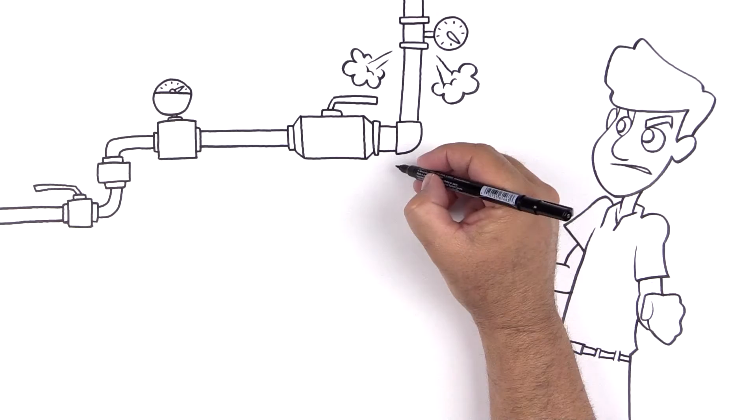Heaters are meant to provide reliable temperature control and stable water heating, yet you spend a lot of time and money to achieve this goal.

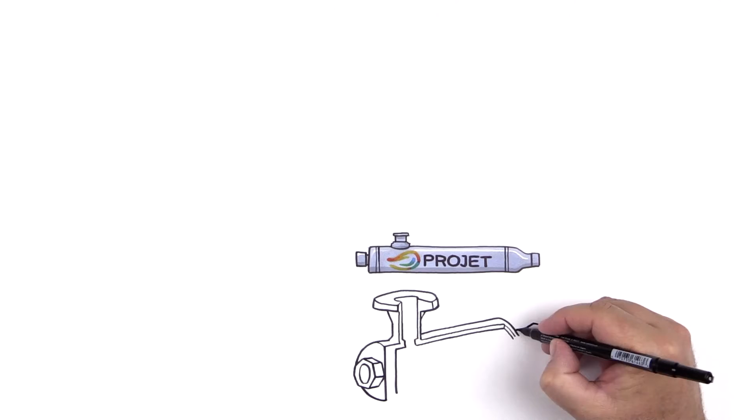ProSonix can help. The Projet Heater is an energy transfer device designed to heat water. With a self-modulating two-stage heating design, the Projet Heater provides stable heating performance and is easily maintained.

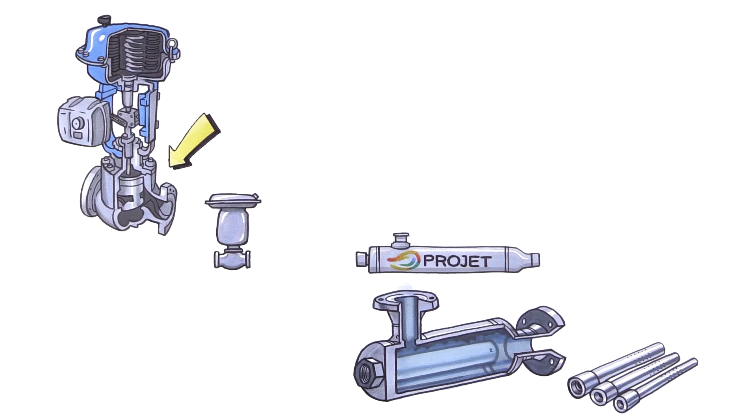The steam control valve regulates steam pressure into the heater. Typically, this valve is a globe valve or a V-notch ball valve. There are multiple heater steam injector sizes which can increase steam heating capacity.

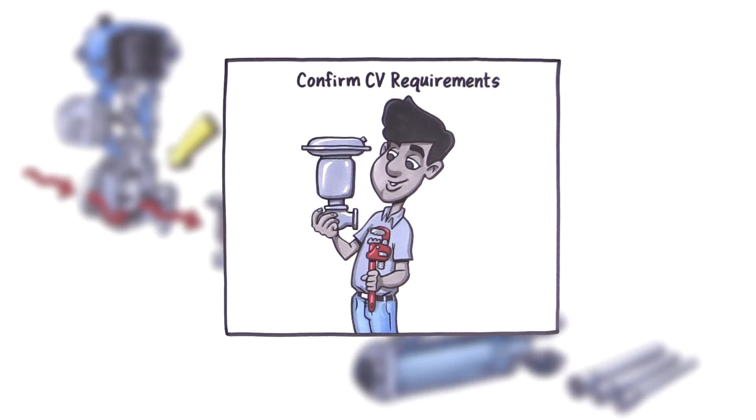Projet hack: don't oversize this valve because it might lead to premature wear and poor temperature control. Review the steam valve sizing to ensure it agrees with the Projet CV requirements.

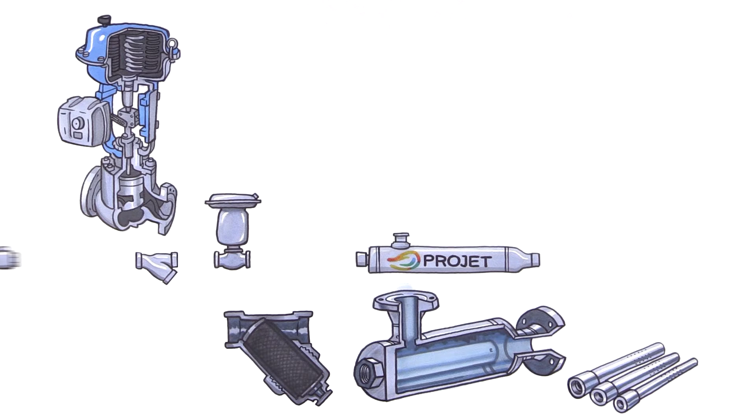The steam strainer reduces the amount of scale or debris that might plug the internal workings of the Projet heater. The steam isolation valve isolates steam for maintenance or when the water heater is not in operation.

Check valves allow steam and water to flow in one direction and prevent water from entering the steam line or steam entering the water line.

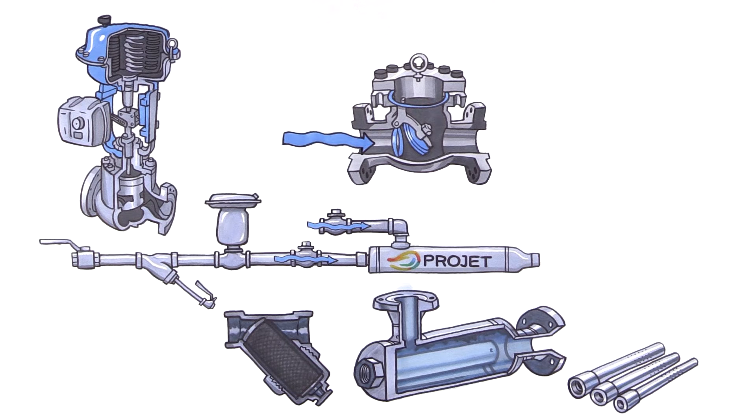The temperature sensor measures the water being heated. Insert the sensor in an area of the discharge piping that gives a good temperature response. The sensor should be located within 10 to 20 pipe diameters of heater discharge.

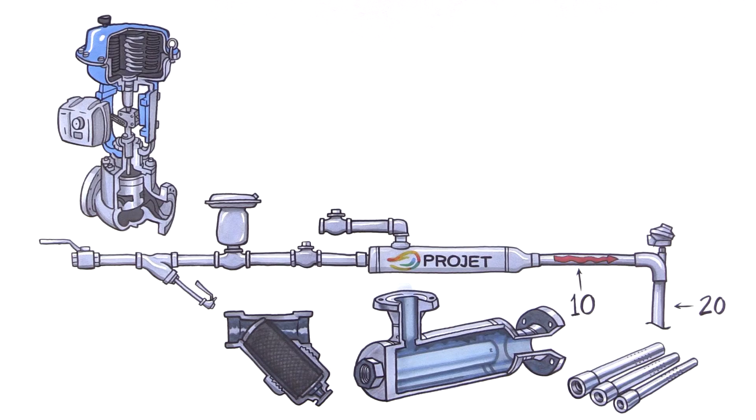The temperature controller compares the temperature output from the heater to a desired set point. A set point is entered on a keypad. The controller receives signals from the temperature sensor and then sends a signal to the steam control valve to regulate the steam pressure to the Projet heater.

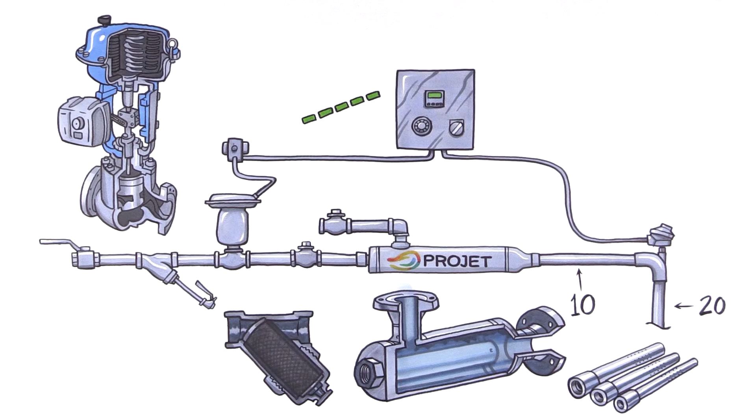The IP transducer converts an electronic signal to a pneumatic signal that's used to drive the pneumatic actuator on the steam control valve to its proper position.

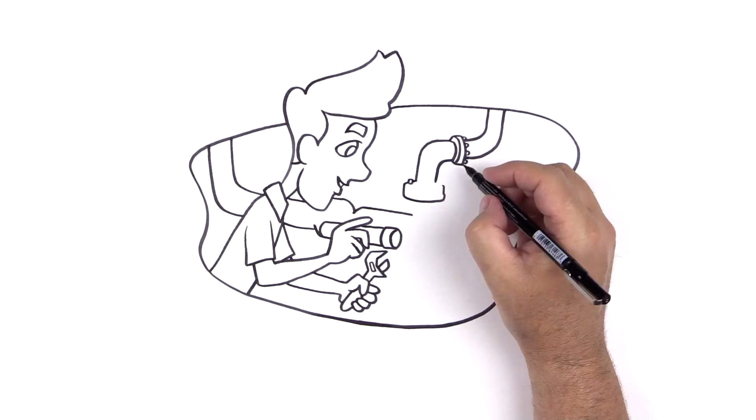During routine installation or maintenance, you can use standard pipe fitting tools. The steam injector can be removed while the Projet liquid body remains installed.

The Projet heater can be installed horizontally or vertically and provide the consistent temperatures that save you time and money.